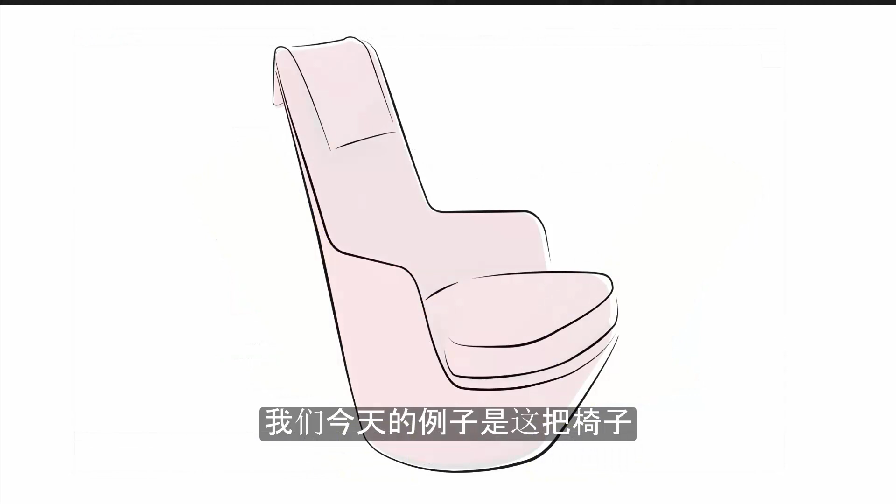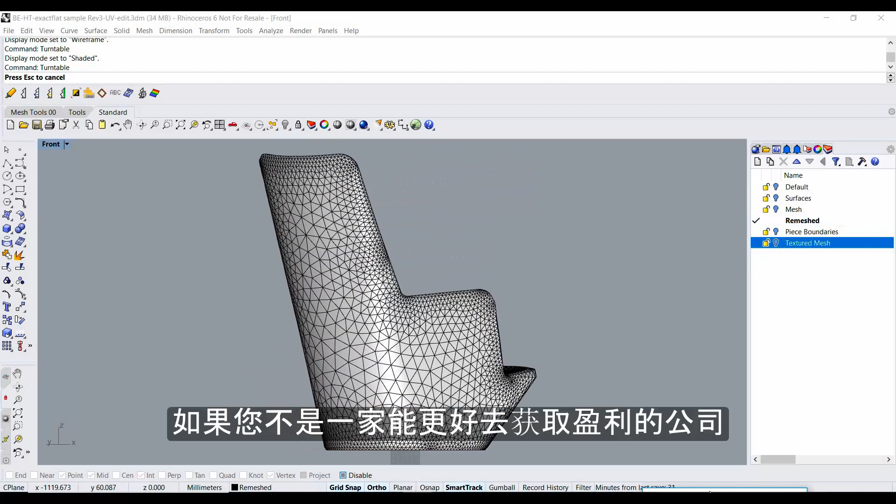Our example today is this chair. It's a real product, it's commercially available, and it's sold to real customers. It's a relevant example because it is also a premium product even though design and development was faster. And with regard to the upholstery patterns themselves, they were made up to 50 times faster. So if you're not one of the better, more profitable companies, the real question is what can you do about it and how can you become one of them?

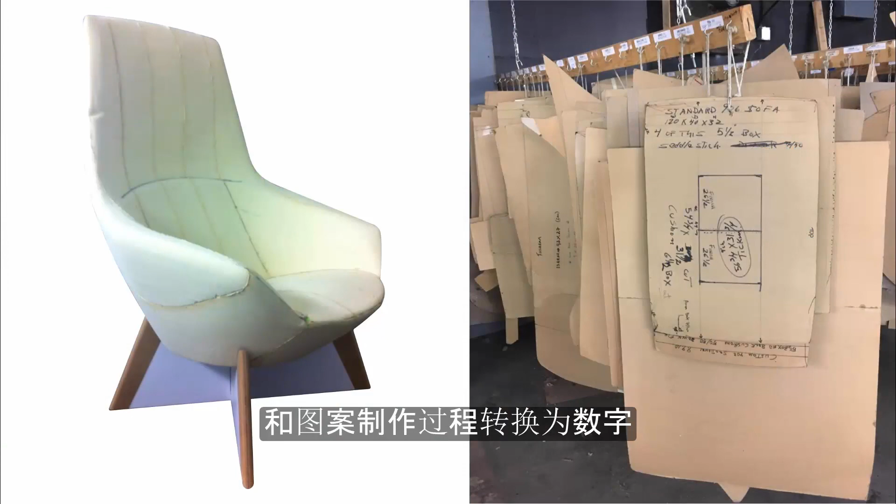Our solution is simple. Convert your manual upholstery and pattern making processes to digital. Use 3D to 2D digital pattern making to create your patterns. Here's the workflow. Step 1, prepare a 3D design with pattern pieces defined. Step 2, convert the 3D model to 2D patterns using ExactFlat. Step 3, create an output file for importing into Gerber AccuMark. Step 4, import your file and add pattern features in AccuMark, such as seam allowances, notches, and grain lines. Step 5, send your patterns to be cut on a Gerber cutter. The whole process is faster, easier, has less steps, and produces accurate patterns that fit great.

We are now going to show this process live. If you have any questions, please post them in the Q&A or the chat feature.

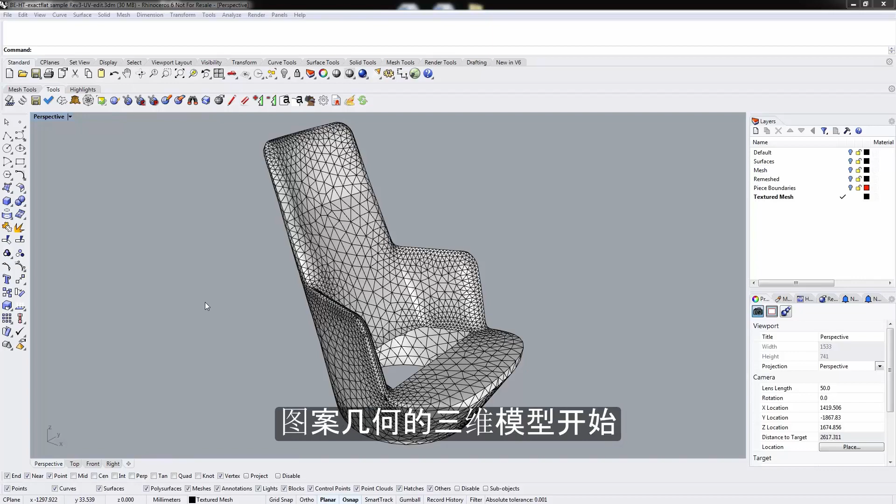Here, we are starting with a 3D model with pattern geometry already defined. You can see there are pieces at the back, the inside armrest, this front section here. We won't be concerned with the hole; that will be made from a different material. There are also pattern pieces defined at the front, at the bottom, as well as the back.

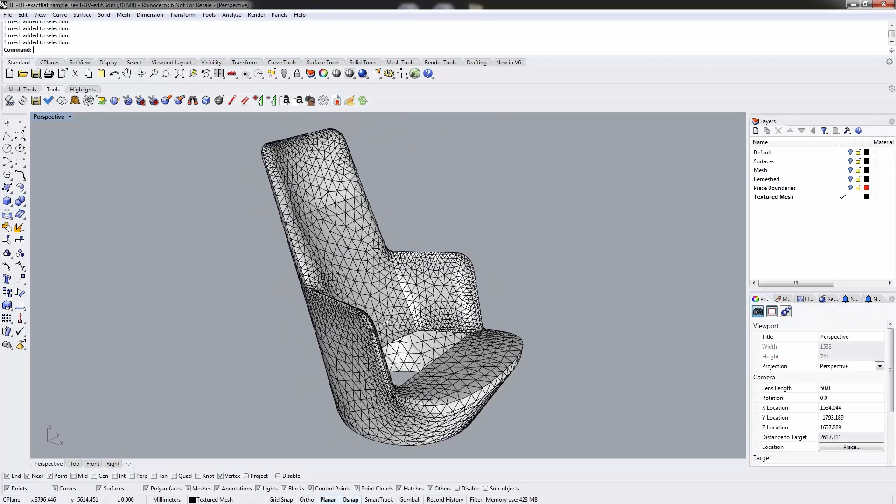The first step in our process is to flatten the patterns. To do this, we're going to rectangle select and hit the flatten icon, and there you go. It's that easy. These are our initial flat patterns. You can notice from these flat patterns that there's color coding on them.

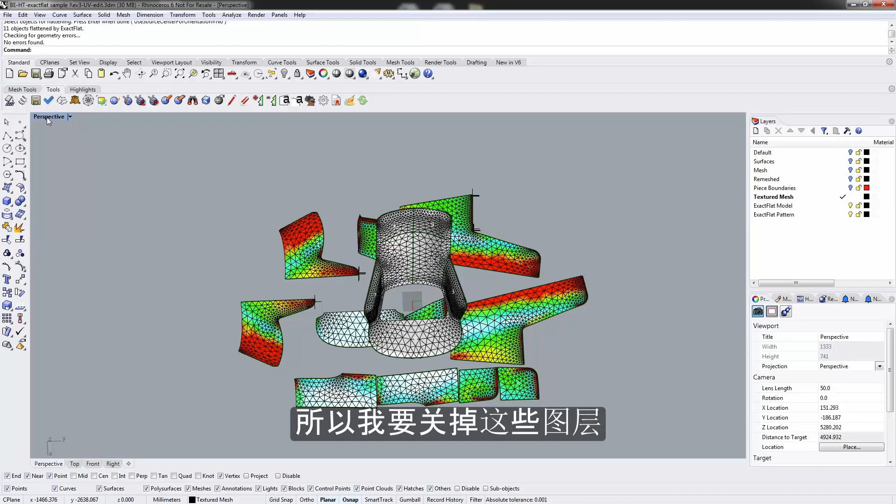Before we go further, we're going to get rid of the 3D model here, so I'm going to turn off some of these layers. First, we're going to use our top viewport so we can see from top down. We'll just resize here, and we're going to select the layers that we want, getting rid of the 3D model from the viewport. There we go. So here we have our pattern pieces.

Now these are our initial flat patterns. These are not yet optimized, so what we're going to do is run through an optimization process. But before we do that, we're going to change the pattern geometry—we're going to edit it. This is like customization on the fly. So all we have to do is select a piece. I'm going to move these pieces out of the way first. We're going to select an edge, and we're going to use our delete cut feature to change the pattern geometry.

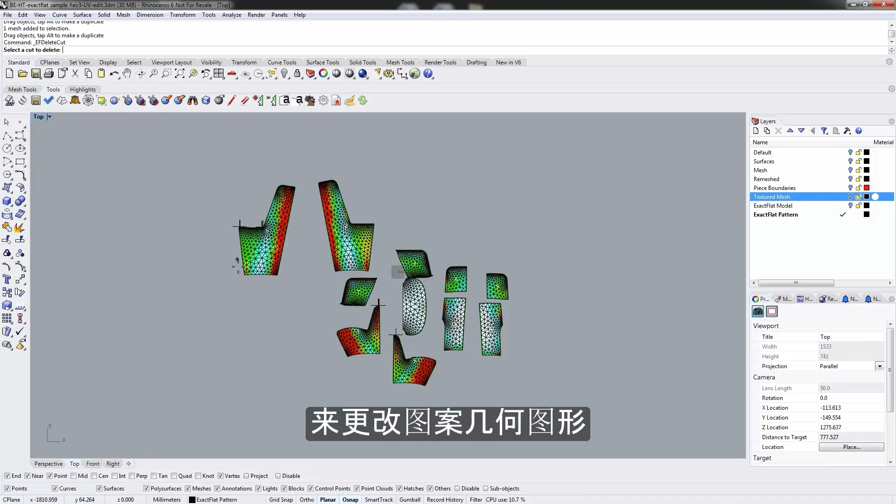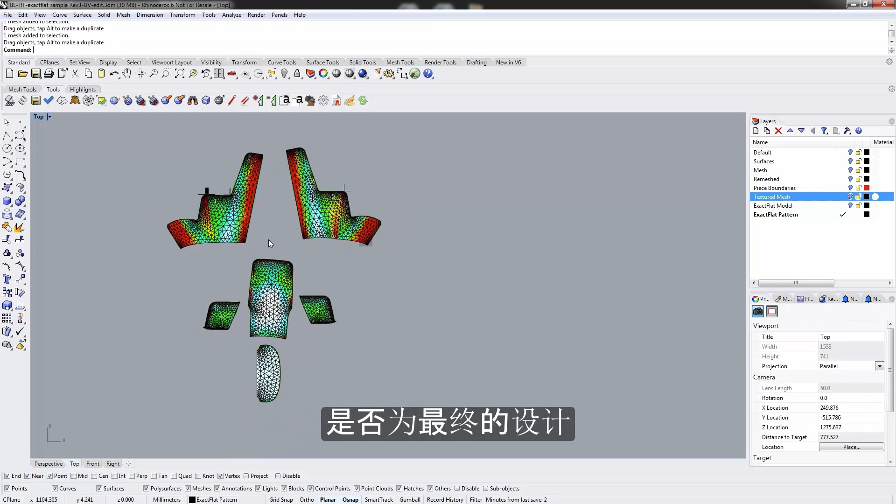Use delete cut, click on the edge, and it automatically sews those two pattern pieces together. Let's look at it again. Select the edge, delete cut, there we go. Very, very quickly we can customize the pattern geometry just like that, whether the design intent was the final design that was going to be used, or if we want to change it, it's very easy to do so.

Now you'll notice on these pattern pieces that there's color coding and these cross hatch marks. The cross hatch marks represent folds or wrinkles. They typically occur in areas of high curvature, so we have to get rid of those folds and wrinkles before we go further.

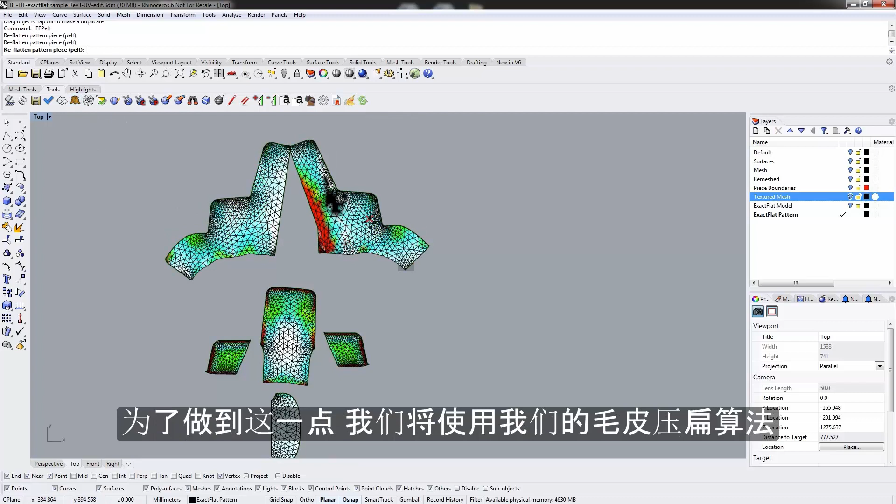To do this, we're going to use our pelt flattening algorithm. You can see as we do that, it's already relaxing some of the strain that was inherent in our initial flat patterns. Now we are not yet optimized, but we're getting closer to the process.

You can see by the color coding where there's areas of strain and areas of sag. The red and yellow represent areas of strain or elongation where the fabric has to stretch, and areas that are black represent areas of sag where you have bunching of the fabric.

Now we're going to use our optimizer to reduce the strain and sag, and it's a pretty straightforward process. We just simply select our spring icon, we select each of the individual pieces, and what the algorithm is going to do now is search for areas of strain and sag.

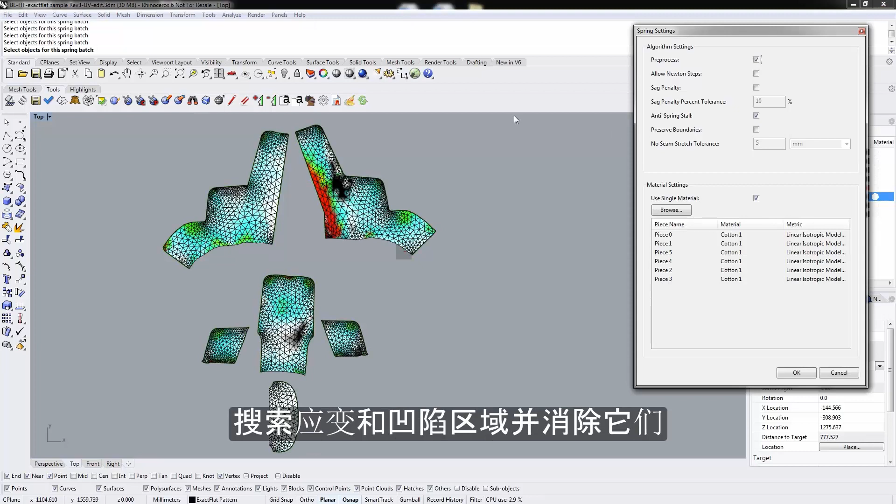It will eliminate them. We're going to just keep our default settings, and now we're going to keep our material setting at cotton. We could change that to leather or any of the 85 other materials that we have in our database, but for now we'll just keep it at the default settings.

So you can see as the algorithm runs, it is searching for areas of strain and sag, and it is eliminating them. You should see the colors changing as we go from piece to piece.

Now what's happening here is the vertices, these are the intersection points of the mesh, are allowed to walk. These vertices can move around and reorient themselves in order to distribute sag or to eliminate the strain.

It is absolutely unique in the marketplace. There are about a dozen different flattening software programs in the marketplace, and maybe you have tried some of them. But ExactFlat is aptly named. The flat patterns that are produced are exact.

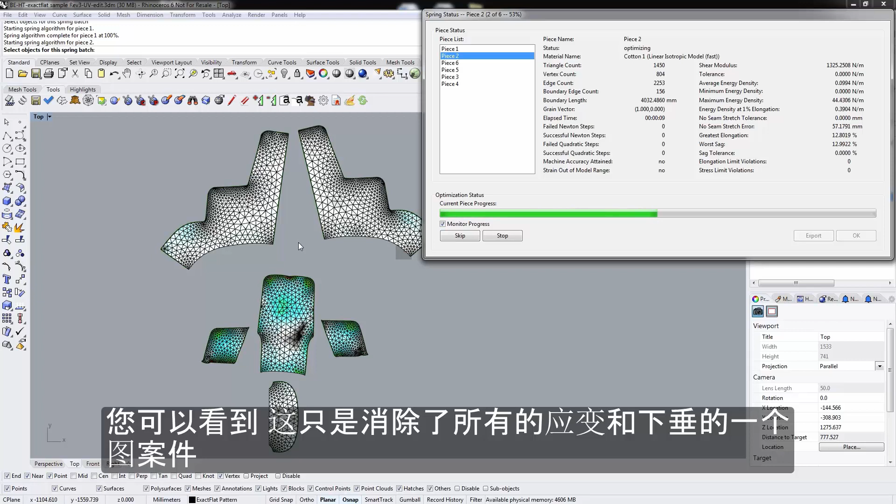You can see that it just eliminated all that strain and sag on that one pattern piece, and it does so fairly quickly. We're just going to let this run.

And it'll cycle through each piece. I suspect the following pieces will go a little bit faster because there's less strain and sag, and they were not particularly complex geometry.

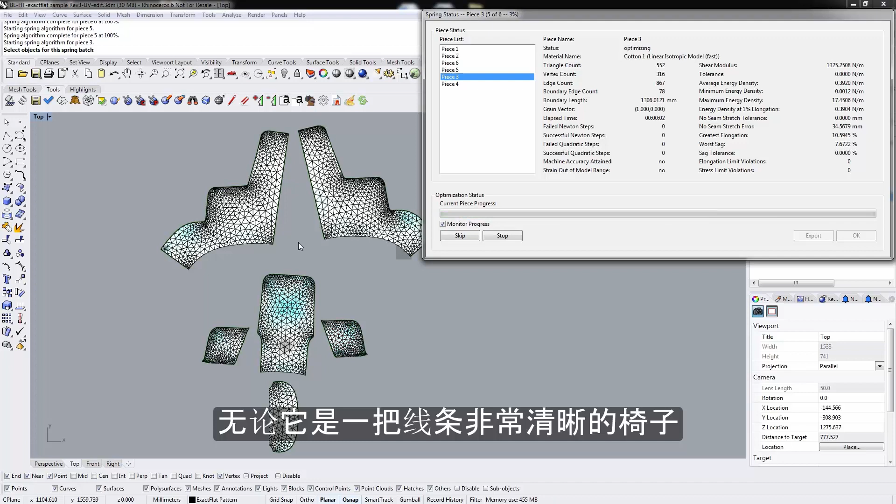Now this will work on any type of geometry that you model, whether it be a chair that has very clean lines, or whether it be lofty. As long as you can model it, you'll be able to flatten it with ExactFlat. And you see, that's it. That's how long it takes to generate an accurate flat pattern.

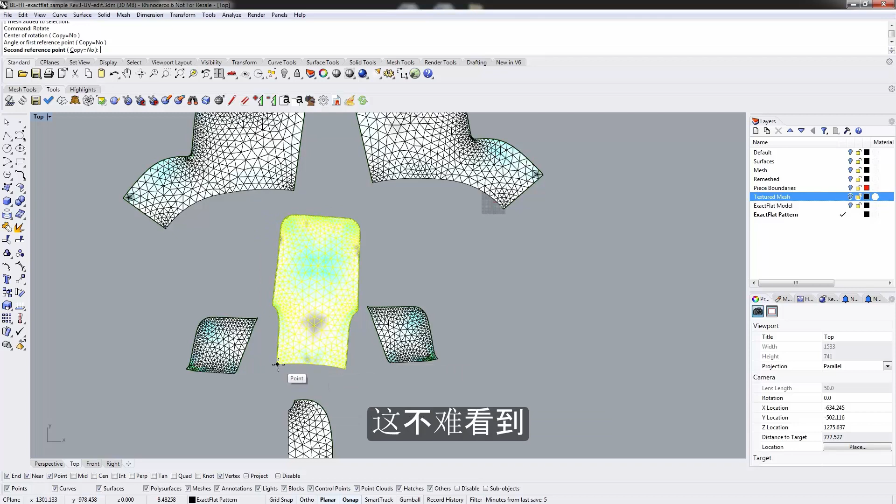The next thing we're going to do is arrange these pattern pieces in space. This is very helpful to see which piece goes with which piece. Now, in a situation like this where we only have 6 pattern pieces, it is not so difficult to see adjacent pieces and pieces that are related to one another. However, if you have more pattern pieces, it's a very easy step.

We use our find tool. So what I'm doing right now is just making this pattern piece on a plane, just organized on a plane. Now I'm going to use our find tool, and for this, what we do is just click an edge, and the neighboring edge will be found.

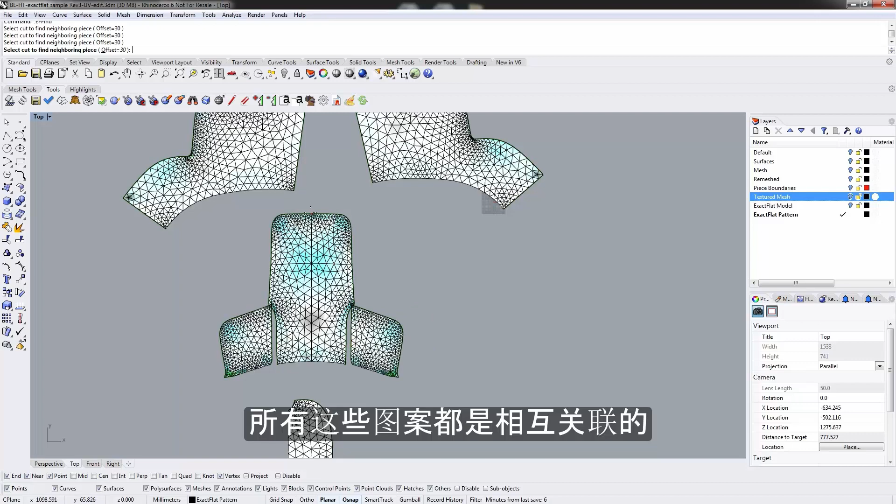Because we're going from 3D to 2D, all these pattern pieces are associated with one another, and that's why we can do this very quickly. So no need to walk the patterns here. You get a perfect alignment of your pattern pieces very quickly and very easily, and this helps with a visual check to see that your patterns have been flattened appropriately.

Let's just rotate this piece around and drag it into place there. There we go. Actually, going to just put some space in here.

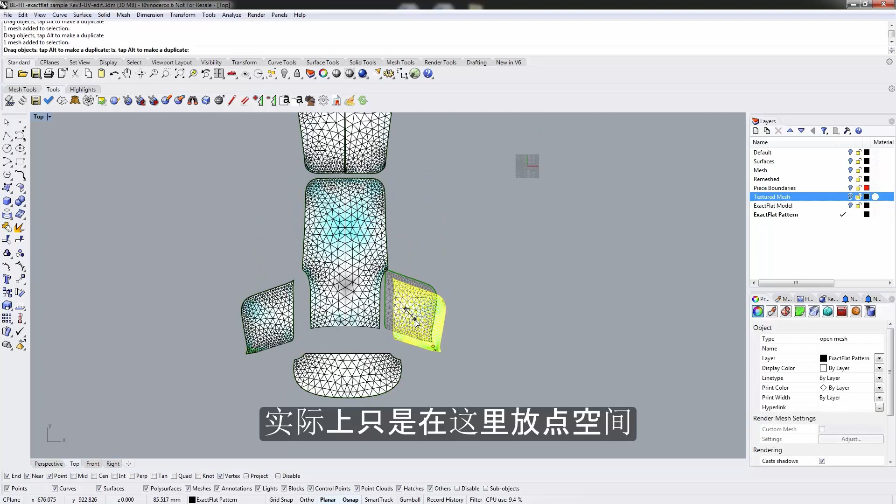And that's it. There's your pattern pieces. There's your flat, optimized pattern pieces.

The next part of the process is to create a DXF file that we can use to import our pattern geometry into AccuMark.

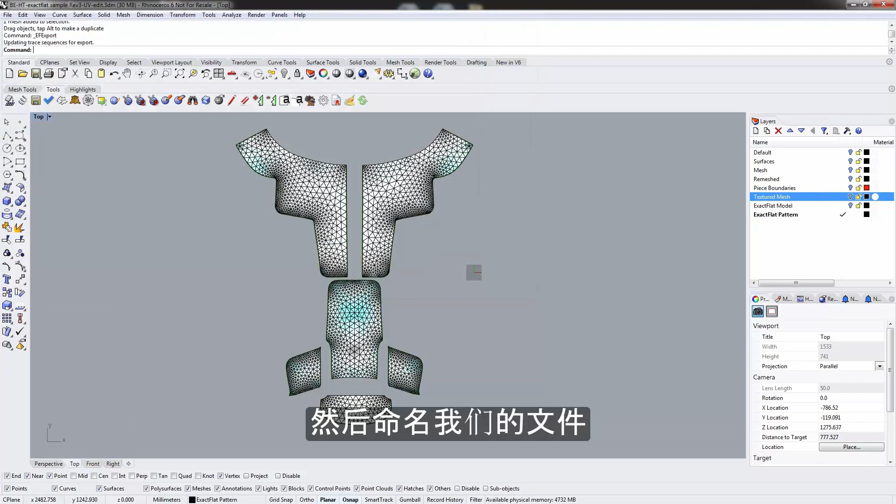So we're going to name our file. We're using the DXF export feature that's embedded in ExactFlat. And now we're just going to re-import the file back in so we can have a visual check.

And there's your pattern pieces in about 7 minutes.

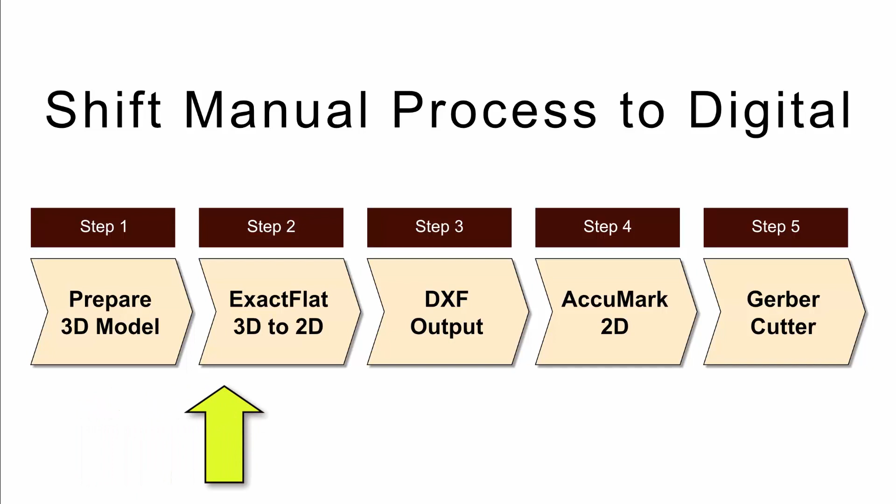We've tried to demonstrate how to shift your manual processes to digital, and in doing so, how you can save a tremendous amount of time in developing your patterns, and also how you can customize your pattern geometry on the fly.

We're going to shift gears now, and we're going to go through the AccuMark process. So we've created a DXF. We're going to import that into AccuMark and show you the rest of the process.

AccuMark has been the gold standard in 2D patterning for many, many years now. And we're going to go through the process of importing our file into the 2D patterning environment.

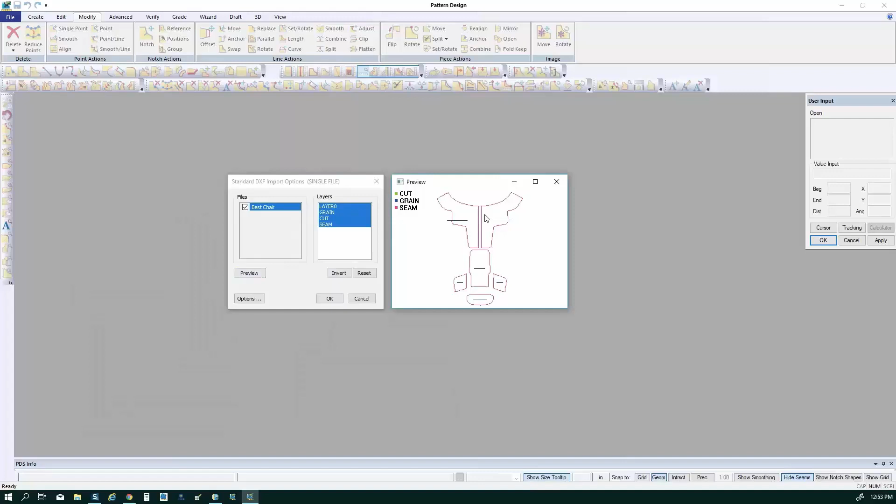Now, because AccuMark has such a large install base and people are very familiar with it, we're not going to go into too much detail in highlighting all of the different features of AccuMark. That's probably for a different day. And I'm sure most of you have probably seen it, heard of it, and if you have not, we'd be happy to go through this with you.

But suffice to say, there is a high degree of compatibility between ExactFlat and AccuMark. You can see you can import different layer states. It's very important to get the unit systems correct. And AccuMark can actually search for notches, it can search for drills, and it can search for markings on a pattern piece and convert those into meaningful attributes to save you time.

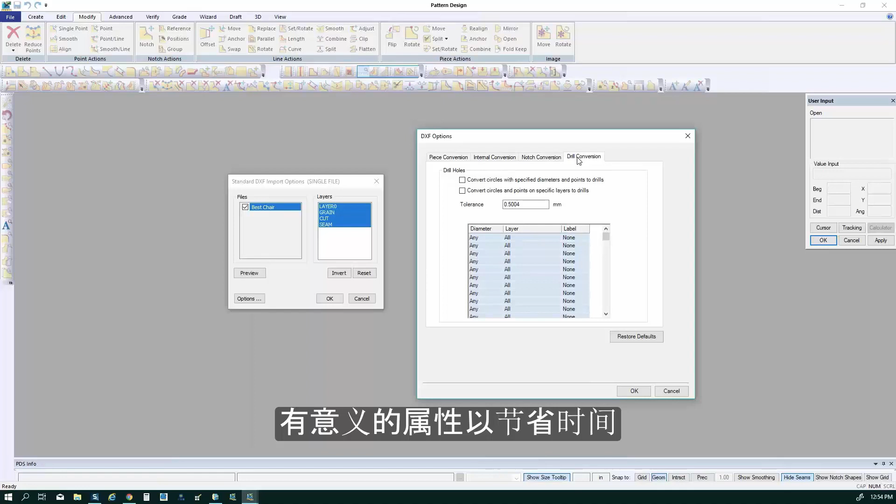One of the things we did not do in the export process with ExactFlat is assign alignment notches and things like that. Had we done so, those alignment notches could be imported into AccuMark and they could be available for adjustment or using as is if it were a part of the design process.

Now here you can see we're just importing the individual pattern pieces, and we've chosen a standard DXF file as our import file format.

And there's the 6 pattern pieces that we created in ExactFlat. We're just going to select them all, and we're going to import them. And there's our pieces right there.

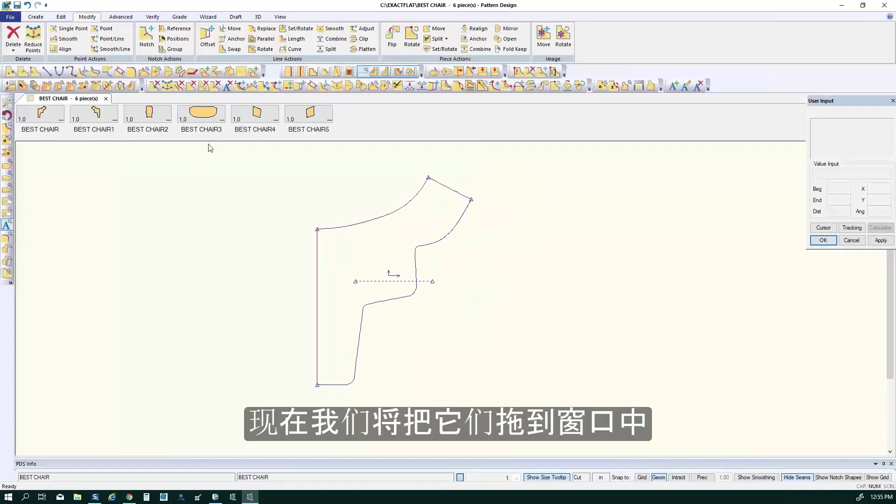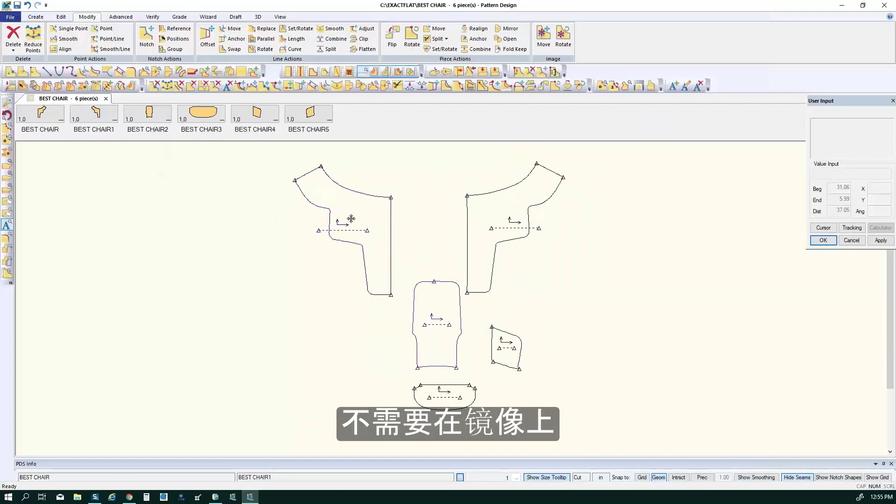Now we're just going to drag them into the window here for our pattern editing, and you can see that we have some symmetrical pieces, or not necessarily symmetrical. There's a symmetrical pattern piece in the middle, but there are mirror images, so we don't have to bring all of the pieces in here. See, those two are mirror images of one another. It's not necessary to do pattern development on the mirror image because we can easily replicate them later.

So we're just going to get rid of those pieces out of the work area, and we're just going to work on the pieces that are shown.

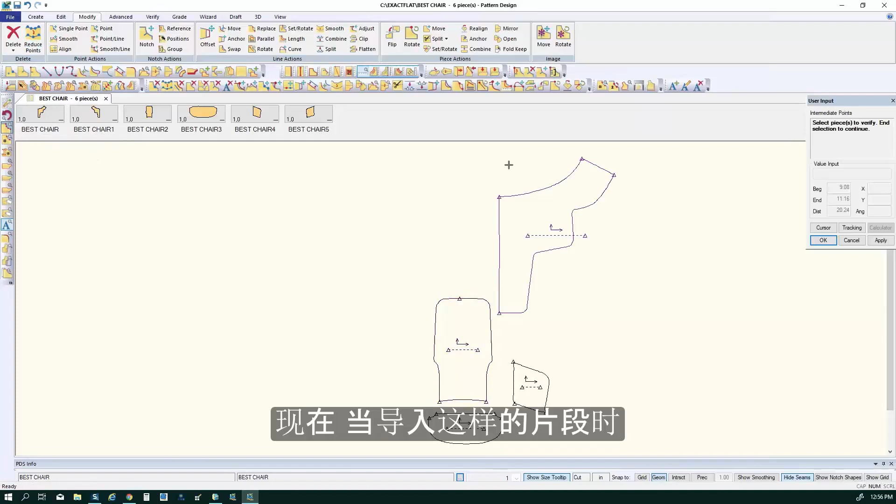Now when importing pieces such as these, you can see we're going to click on this piece right here. You can see there are a lot of control points here. Too many control points for the purposes that we have today. So we're going to go ahead and decimate the number of control points and reduce them. It's a pretty straightforward process.

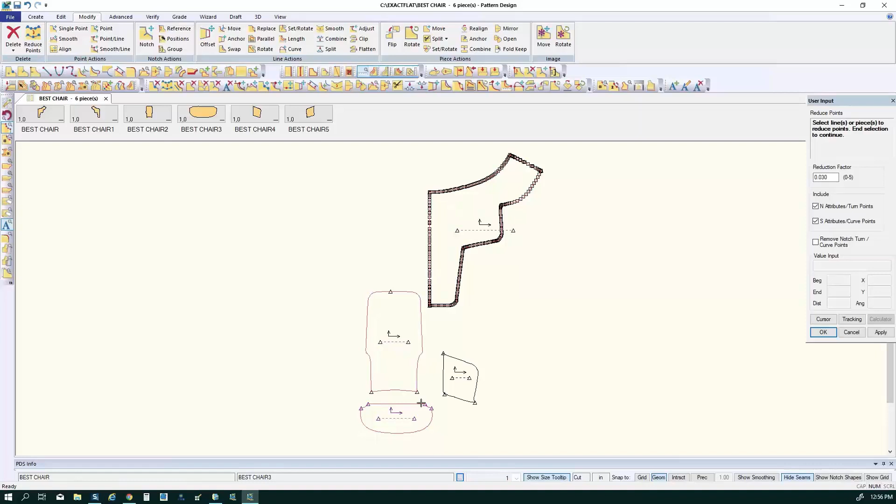See, we just click the button to reduce the control points. And there you go. Control points have been decimated. Now we have a more manageable number that's commensurate with the type of curvature that we have for this particular pattern piece.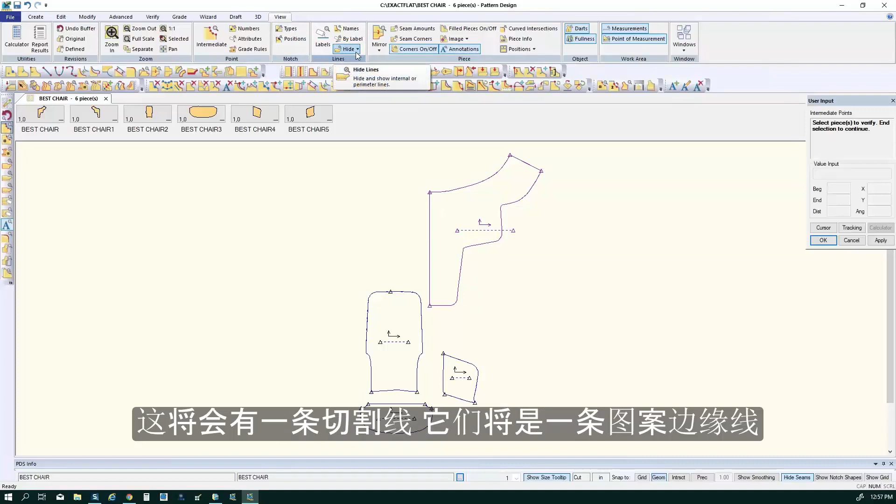Now that we've reduced the number of control points, the next thing we want to focus on is that oftentimes when you import pattern geometry into AccuMark, there will be a cut line and a pattern edge line. The pattern edge line is the edge of the pattern piece, and the cut line cuts with seam allowance added. If there's no seam allowance on import, often these two lines will be superimposed. We're going to check for that and delete the superimposition so we have just one perimeter edge, so that when we add seam allowances later we'll have the correct geometry.

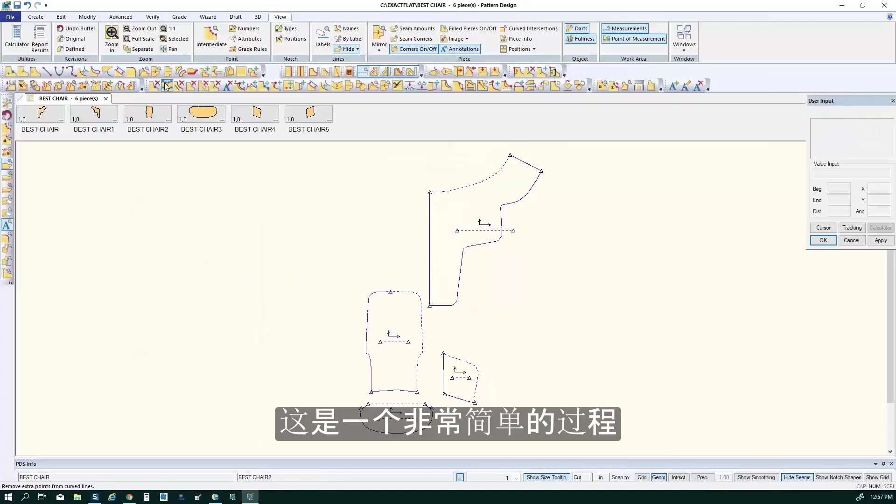This is the kind of thing where, if you want more detail, we can have an AccuMark specific session to go over it. Suffice to say, it's a very easy process, and you'll see we get through this in just a few seconds on this particular part.

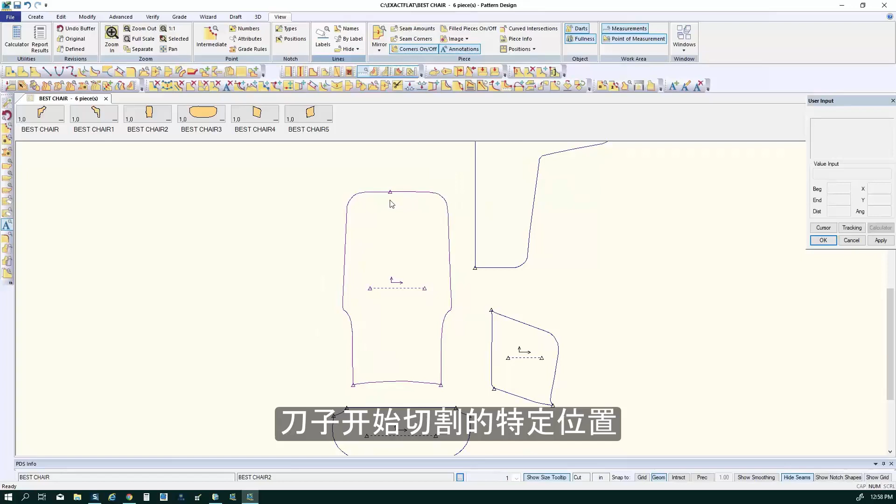The next thing to note is the little triangles there. Those denote the specific locations where the knife will start cutting, and we may not want the knife to cut from those places, so we're going to make some adjustments.

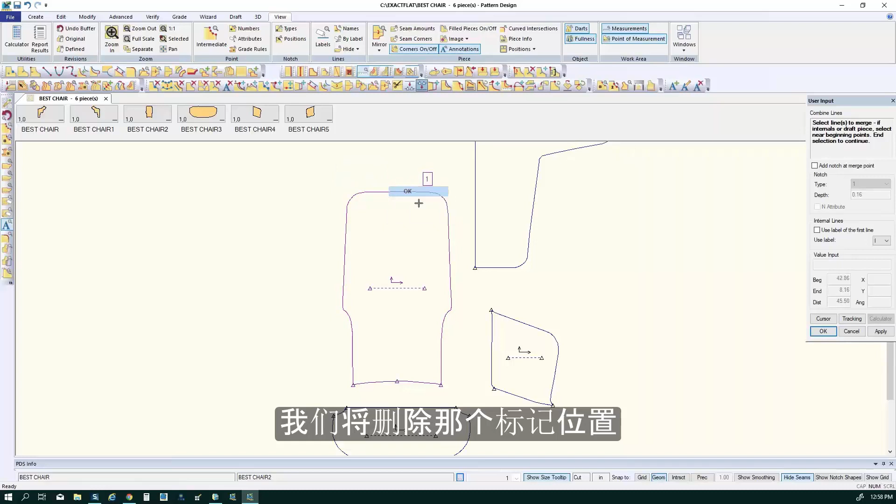First we're going to put a midpoint in this line here, and that's where we want the knife to start cutting. Then we'll go up to the top of this pattern piece and delete that mark location, so the knife will cut as a sweep around the whole perimeter edge. That's pretty easy to do. If you have to make adjustments like that, where the knife begins and ends cutting, those are easy things we can do.

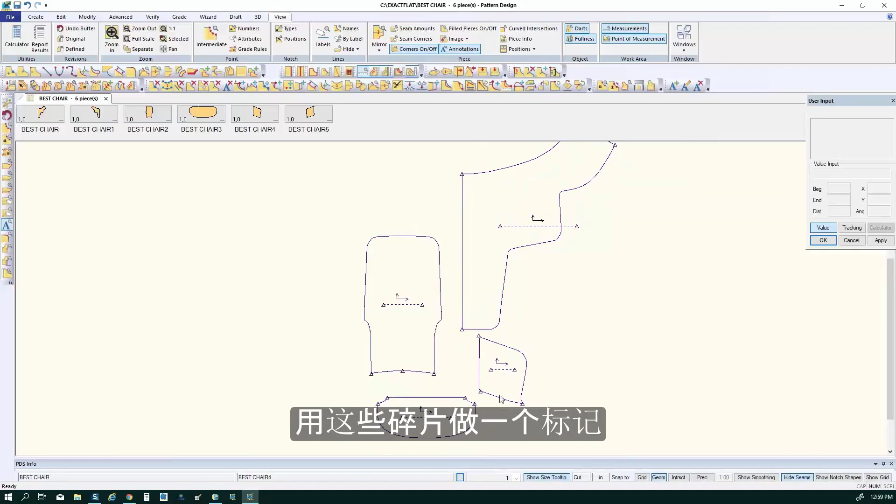Now, if we made a marker with these pieces as they are, they would be brought into the marker in this orientation, and that may not be what we want. So we're going to rotate these pieces here.

We're going to rotate them by 90 degrees. First we go ahead and select the pieces. Yep, all 4 are selected. Click OK, and you can see they're rotated.

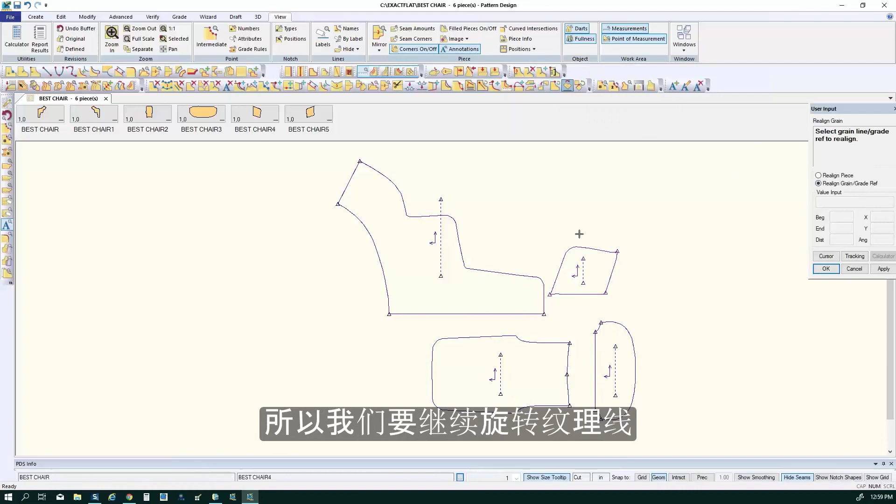Now we have to adjust the grain orientation. You can see the grain orientation is denoted by the axes with the arrows, so we're going to rotate the grain lines and put new grain lines in. There we go. Now we have a grain line that will be consistent with the fabric, and we can get rid of these other lines because we don't need them.

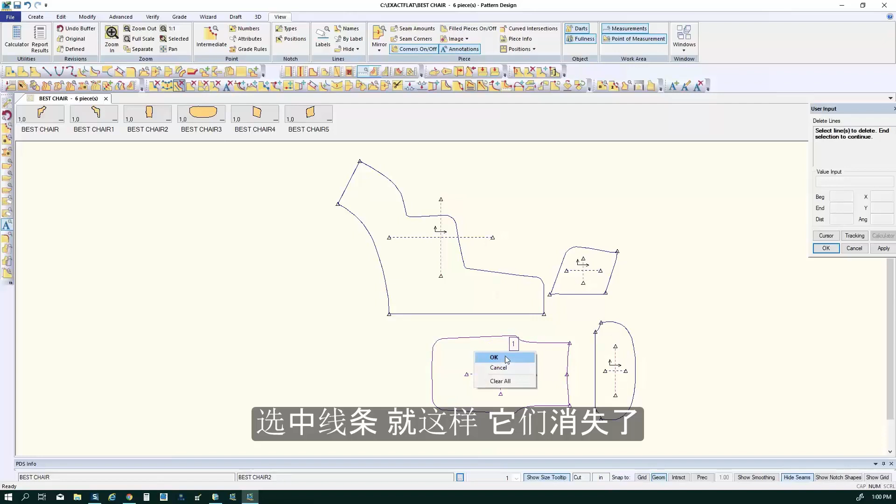Let's go ahead and delete those. Click on delete, pick the line, the lines are selected, and there we go, they're gone. Now if we bring them to the marker, they'll be brought in with this orientation and this grain direction.

Okay, we're just about ready to save the model, but before I do that I want to clean up a few things. I'm going to move this grain line down to the bottom of this pattern piece. There's no functional difference having the grain line higher or lower, it's just cosmetic. Once that's done, we're going to save this model and save the pieces. Let's click OK here, select the model, and click OK.

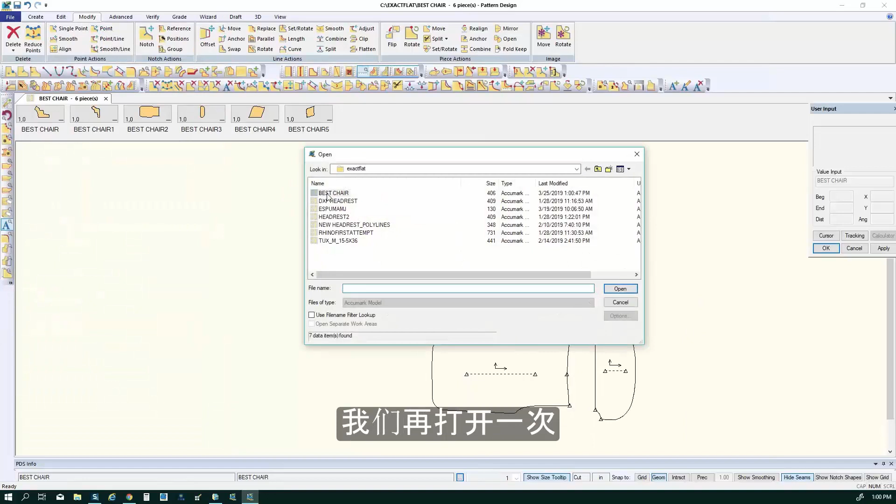All right, now let's just make a few little edits to the model. Let's open it up again, and click Continue. And there are our pieces.

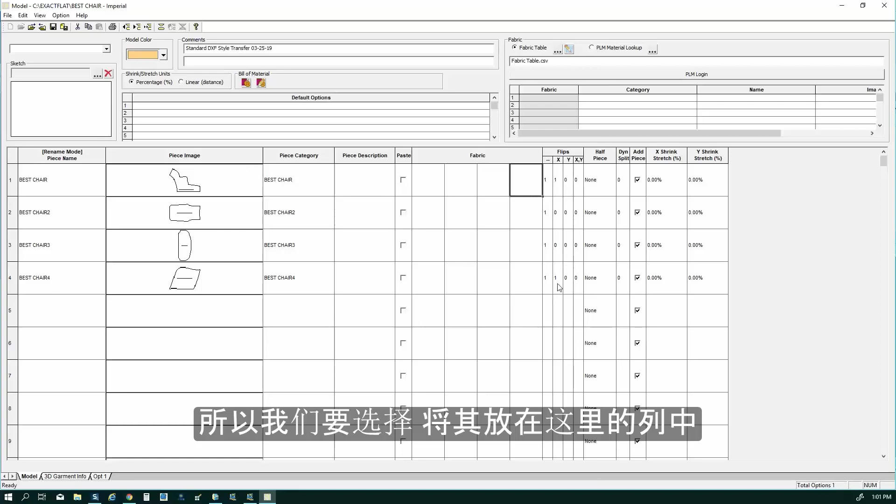Now, if you recall, we had mirror images, so we can delete the pieces we don't need. Let's select the bottom one here and delete that row. The next thing is we have to actually create the second mirror image, so we're going to put in the X direction and effect a flip of these pieces, piece number 1 and piece number 4. So we're going to put a 1 in the column here, and these will be flipped in the X direction.

Now let's save the model again and save the pieces, and you can see there we have the pieces that are ready to go. So we're going to overwrite the previous one.

Now that we've finished orienting our pattern pieces and the grain lines, if we want to add additional features, for example alignment notches, we can select the edge onto which we want to place them.

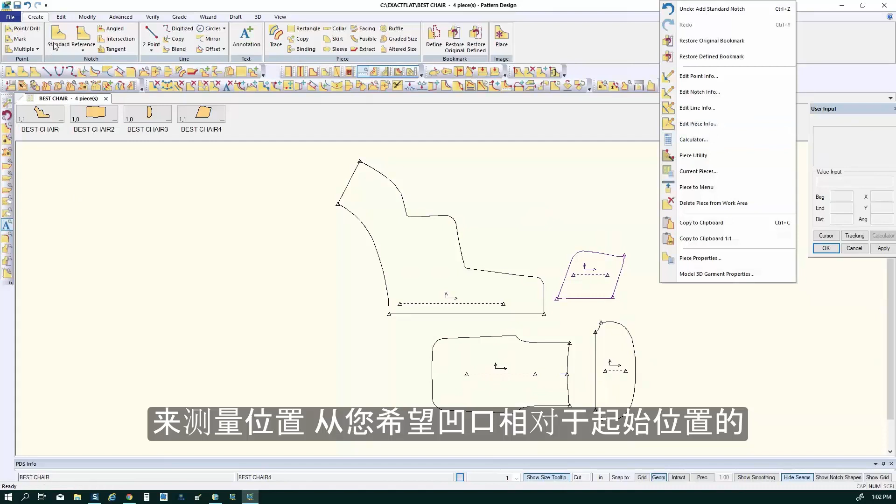We can use measurement tools to measure the location where you want the notch in relation to a starting location. So on this piece, let's measure and put in 4 inches from the end vertice point, click OK, and you see we have the slit notch which has just been added. The tools are very flexible, so notches can be put in a very versatile way.

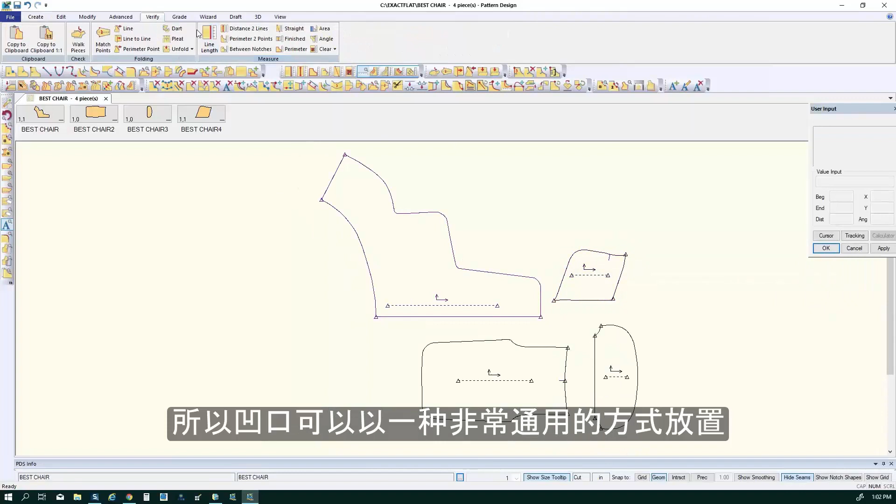If we wanted to put measurement dimensions onto lines, you can see we've just added dimension lines there. And there's additional tools for making adjustments to lines. For example, if you want to make a line parallel to another line, you can do that quite easily.

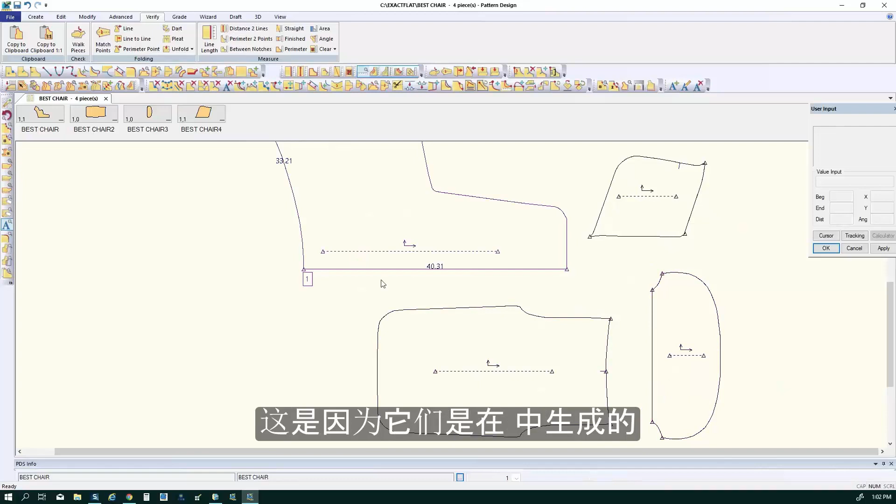In this particular instance, the pattern pieces look very good, and that's because they were generated in ExactFlat. So very little pattern editing is required.

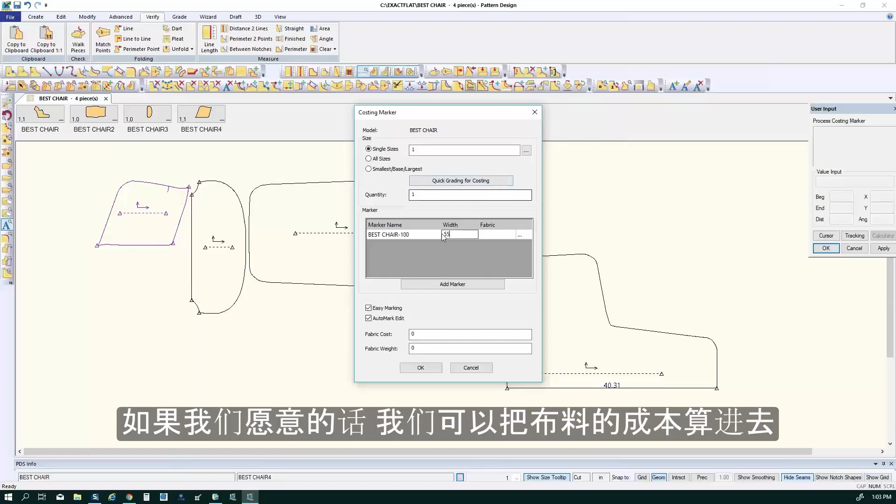Now we're going to go ahead and create a marker. This is a costing marker. We're going to select a material width here - in this case, why don't we use 55? And we're going to select easy marking for our example and create a marker. If we wanted to, we could put the fabric cost in, but let's just go ahead and create a marker.

Click OK, and now the program is transferring the file. And there it is - there's our easy marker. There are other marker making options in AccuMark, but I think this will conclude our AccuMark demonstration for now.

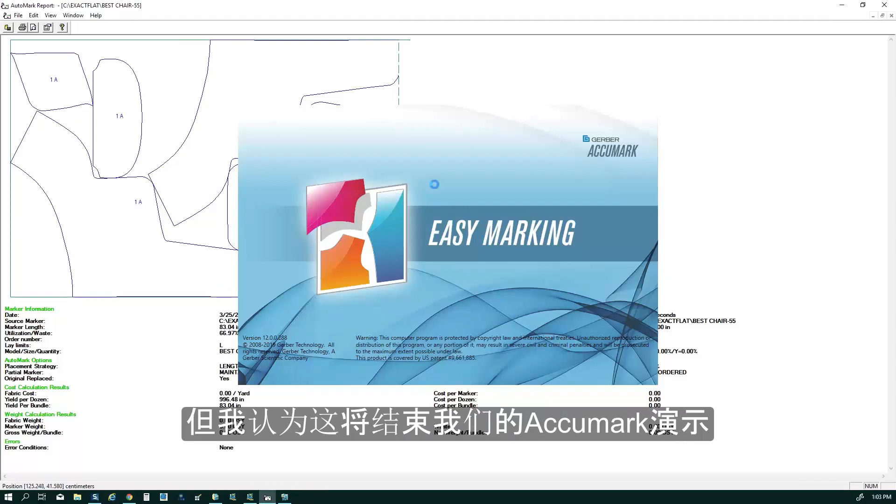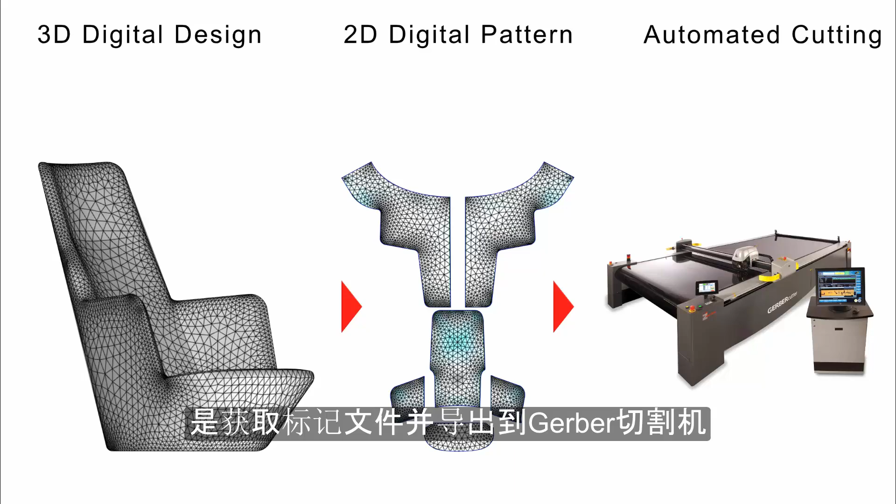Now, the last step in the process is to take the marker file and export to a Gerber cutter for automated cutting. And there you have it - 5 steps from 3D CAD to cutter, a full digital process.

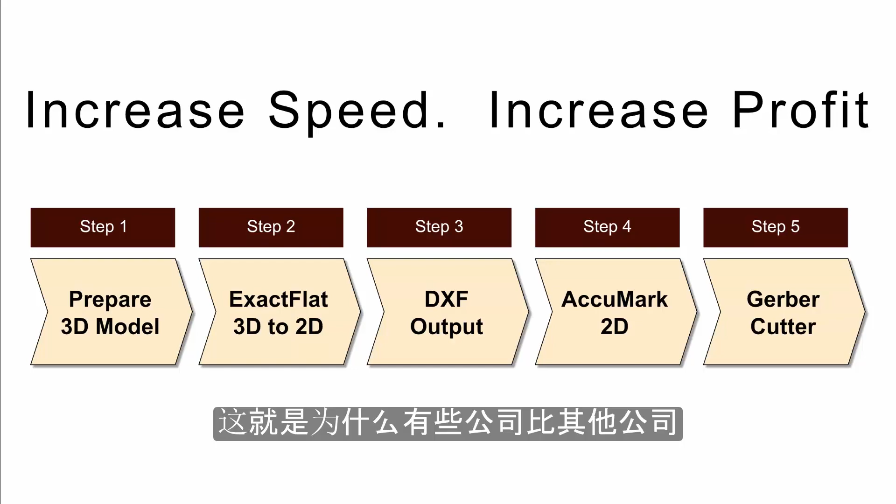This is why some companies are faster and more profitable than others. The transformation to digital eliminates manual process. Digital creation is faster, digital editing is faster, and digital sharing is faster.

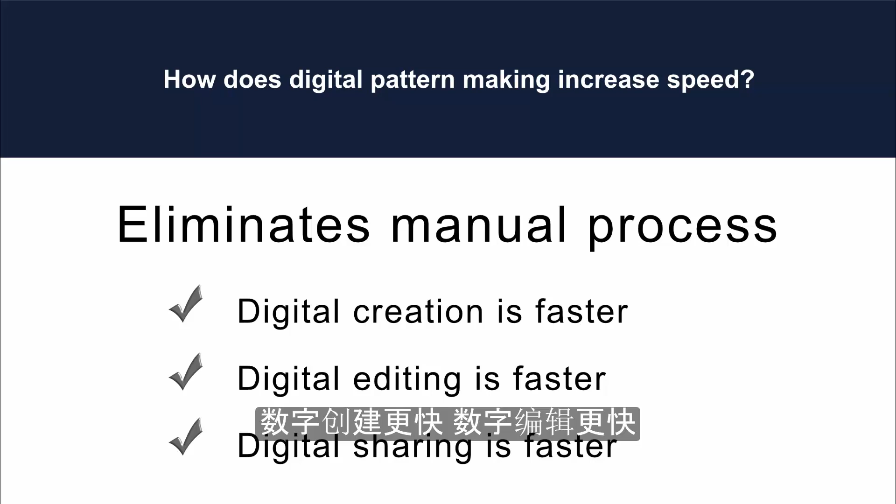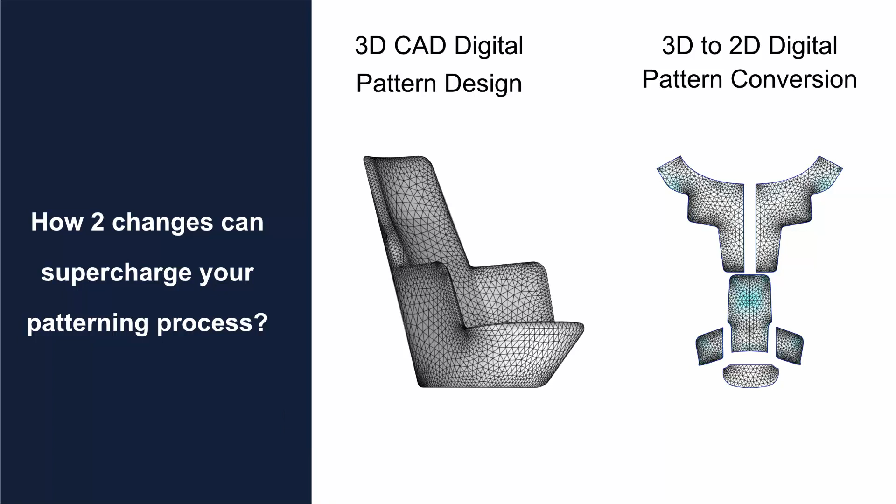There are 2 changes that supercharge your patterning process. First, envision and design your patterns in 3D. Secondly, take your pattern geometry in 3D and convert it to 2D using a tool like ExactFlat.

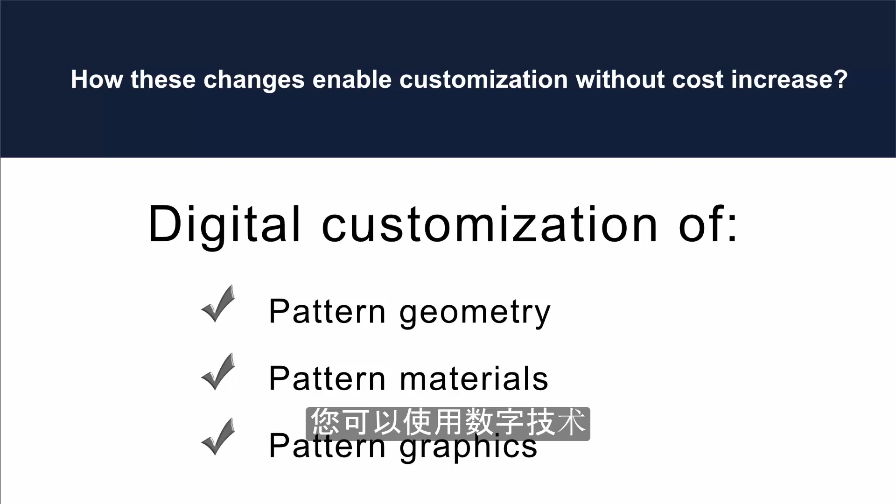Making these changes will enable customization without cost increases. You'll be able to customize your pattern geometry, your pattern materials, and your pattern graphics using digital techniques.

Okay, let's circle back to our original question. Our topic today has been, why are some furniture manufacturers faster and more profitable than others? There were additional questions we asked, such as what can you do about it and how can you become one of them? Our recommendation was very simple: convert manual process to digital and use 3D to 2D digital pattern making. We demonstrated the solution using two industry-leading products, ExactFlat and AccuMark from Gerber Technology.

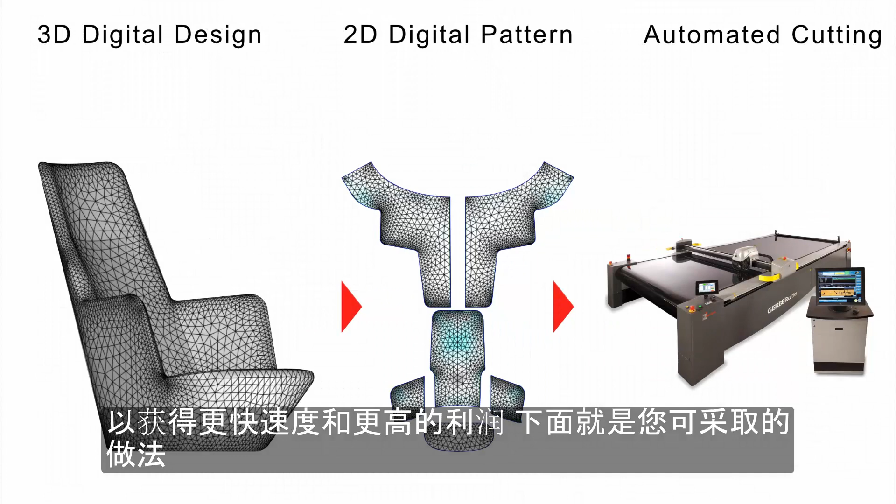If you're interested in taking the next step to get faster and more profitable, here's what you can do: contact us. We'll provide a custom example on your specific designs, and we'll work with you and suggest the best workflow. That about wraps it up.